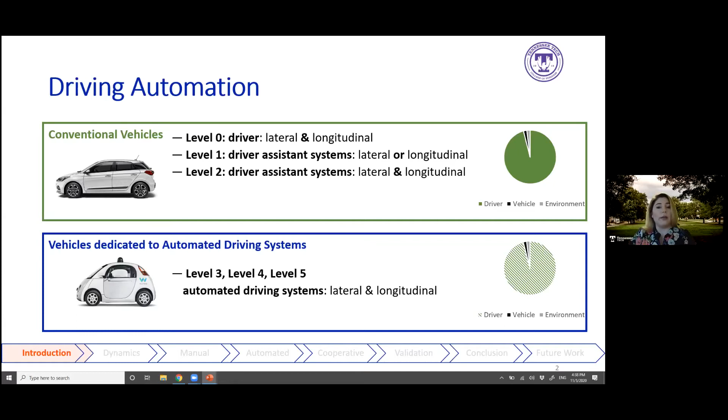Cooperative driving automation is a new chapter in the transportation engineering field. It means vehicles dedicated to automated driving systems use vehicle-to-vehicle communication to cooperate with their surrounding vehicles. The intent is to enhance dynamic driving task performance, safety, and traffic operations.

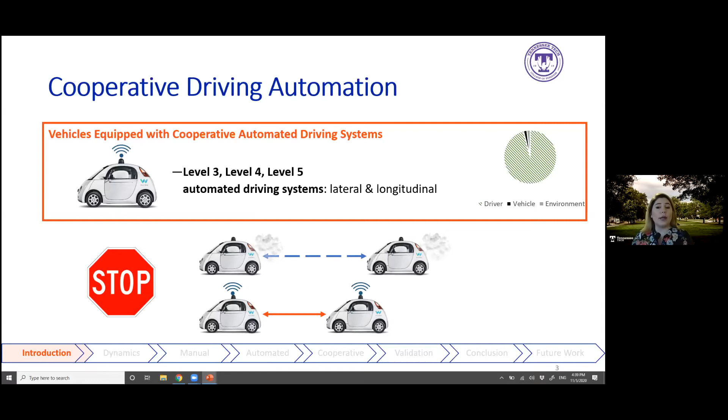As you can see in the figure I've demonstrated here, vehicles equipped with cooperative automated driving systems can follow their leaders at shorter gaps and with less variation in acceleration and deceleration compared to vehicles dedicated to automated driving systems.

Commanded accelerations and decelerations are automatically confined to maximum accelerations and maximum decelerations specific to vehicle properties, road conditions, speed, and operation mode. Longitudinal controller coefficients in this research are those proportional, integral, and derivative gains that can be tuned to achieve desired performance, such as maximizing throughput without compromising safety or string stability.

In this research, vehicle dynamics is incorporated into minimum safe distance gap, maximum acceleration, and maximum deceleration for conventional vehicles, and minimum safe time gap, controller coefficients, maximum acceleration, and maximum deceleration for vehicles dedicated to automated driving systems, which we call vehicles in automated mode, and vehicles equipped with cooperative automated driving systems, which we call vehicles in cooperative automated mode.

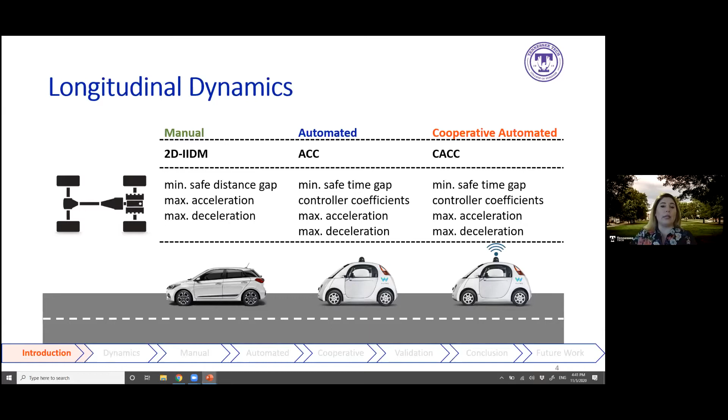So what is the problem here? The problem is that conventional traffic microsimulation tools, such as VISSIM and AIMSUN, automatically confine accelerations and decelerations to constant or estimated maximum accelerations and decelerations, and rely on constant distance gaps and time gaps to simulate longitudinal control for automated vehicles in a platoon or a string.

So when you want to simulate longitudinal control functions such as adaptive cruise control or cooperative adaptive cruise control, you have to input all of these longitudinal control variables. It's not like cooperative adaptive cruise control in the real world, where these variables are calculated automatically.

For example, VISSIM empirically estimates maximum acceleration and maximum deceleration based on speed, AIMSUN assumes a constant maximum acceleration and deceleration as default, and MITSIM uses a constant maximum acceleration and deceleration for each speed range. All require user inputs for distance gap, time gap, and controller coefficients to simulate automated vehicles in a platoon or string.

This research, what does it do? It incorporates driver characteristics, engine, transmission, and drivetrain properties, aerodynamic resistance, rolling resistance, grade resistance, speed, and operation mode — which we collectively call vehicle dynamics — into calculating maximum acceleration, maximum deceleration, minimum safe distance gap, minimum safe time gap, and longitudinal controller coefficients, which I call longitudinal control variables in the rest of this presentation.

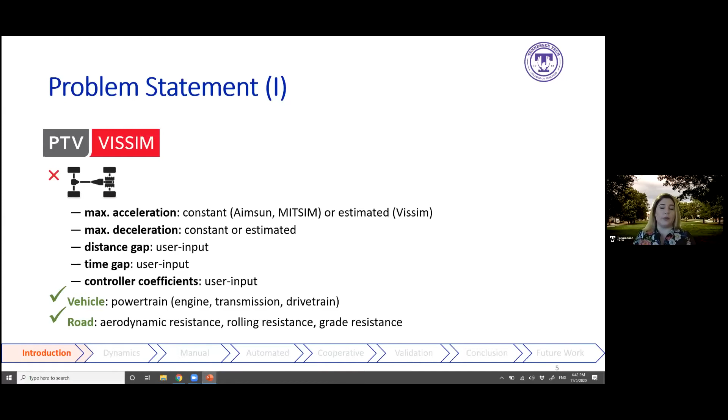So how do we incorporate vehicle dynamics into a traffic microsimulation tool? Currently, none of the traffic microsimulation tools are able to model vehicle dynamics. So what we did, for example, to calculate maximum acceleration, we adopted the model developed by Dr. Washburn at the University of Florida, who was the first to introduce maximum acceleration in a traffic microsimulation tool. This tool is called SwashSim.

I personally developed maximum deceleration, minimum safe distance gap, and minimum safe time gap, and incorporated them into a new traffic microsimulation tool.

Maximum deceleration is calculated based on maximum braking force, aerodynamic resistance, rolling resistance, grade resistance, and mass.

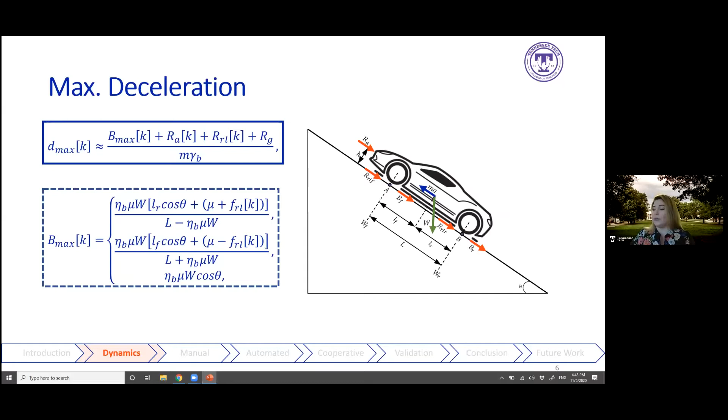Minimum safe distance gap and minimum safe time gap are calculated based on sensing delay for conventional vehicles and vehicles dedicated to automated driving systems, and communication delay for vehicles equipped with cooperative automated driving systems, as well as speed, aerodynamic resistance, rolling resistance, grade resistance, and maximum deceleration.

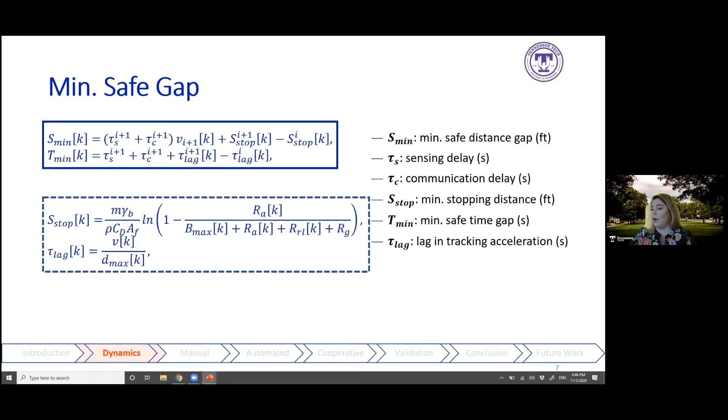I don't want to go through the equations in more detail — you can find them in my recent publication in Transportation Research Part C.

Regarding vehicle generation — because in a traffic microsimulation tool you have to generate vehicles and then simulate the interactions between these vehicles and their surrounding environment — how do we generate vehicles? Regarding the vehicle dispatching model for our traffic microsimulation tool, we assume that entry headways follow a shifted negative exponential distribution, with the distribution parameter calculated based on flow rate and minimum entry headway. So it's based on random distributions.

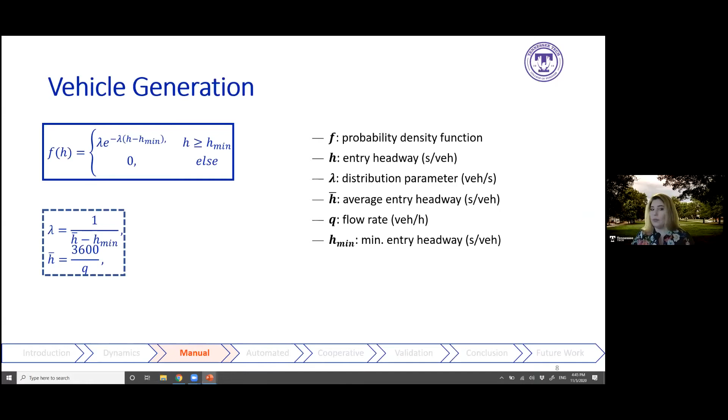Our customized traffic microsimulation tool contains 10 driver types. We have several modules: one is driver, another is vehicle, and another is operating mode. Regarding the driver module, we have 10 driver types, ranging from type 1, the most conservative driver, to type 10, the most aggressive driver. We treat drivers, vehicles, and operating modes as distinct objects so that users can customize vehicle and driver characteristics separately.

Conventional vehicles are assumed to follow a two-dimensional improved intelligent driver vehicle-following model, a well-known vehicle-following model. But what we did was consider driver characteristics, physical and powertrain properties, and resistance forces in calculating minimum safe distance gap, speed, maximum acceleration, and maximum deceleration. So we adopted a vehicle-following model commonly used in transportation engineering, but modified it based on vehicle dynamics.

The two-dimensional improved intelligent driver model is easier to calibrate and demonstrates more stable performance compared to the Wiedemann model, which is the vehicle-following model used in VISSIM.

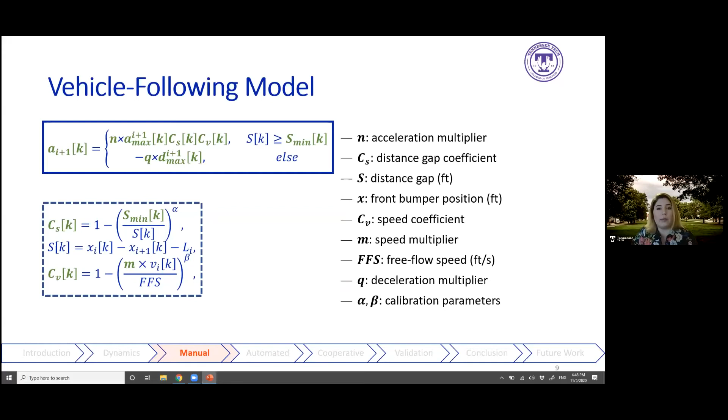VISSIM is a very well-known traffic microsimulation tool. We consider 10 passenger car models, a single unit truck, an intermediate semi-trailer, an interstate semi-trailer, and a double semi-trailer. In our traffic microsimulation tool, we have implemented vehicle dynamics models for 10 passenger car models and 4 truck configurations. We can include more, but for these 14 vehicle models, we had data.

We consider them over 2 driving schedules: US06 and Cycle D. These 2 driving schedules were assumed to be a reference speed profile for our leader, and they are designed to test vehicles with aggressive driving behavior. We wanted to test them in 2 driving schedules designed for aggressive driving behavior to make sure we can capture the full range of the vehicle dynamics model.

All the results in the upcoming slides are calculated by taking the average of 20 replications for each scenario. Because vehicles are generated randomly, we use 20 replications to make sure we capture all of the vehicle models with all of the driver characteristics and vehicle dynamics models. We could capture more, but after trial and error we found that 20 is a reasonable number.

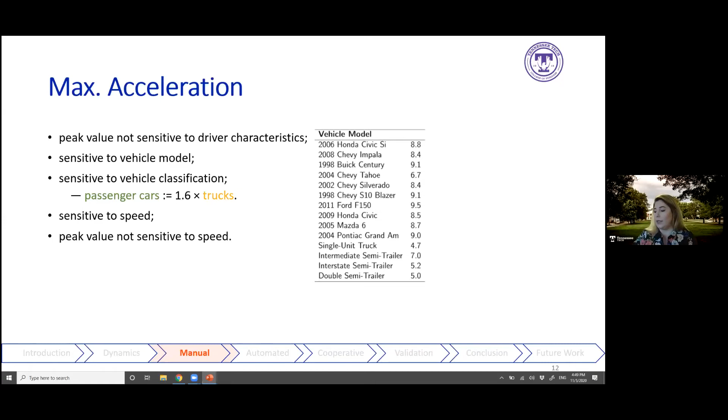Regarding maximum deceleration, the same - it has a dynamic model, but has less variation compared with maximum acceleration. Maximum deceleration is also sensitive to vehicle model, vehicle classification, and speed. For example, it ranges from 24.6 to 27.9 feet per second squared for passenger cars and 19.4 to 26.2 feet per second squared for trucks. Passenger cars have on average 1.2 times higher maximum deceleration compared to trucks, and on average vehicles have higher maximum deceleration at higher speed. However, peak maximum deceleration is not sensitive to driver characteristics.

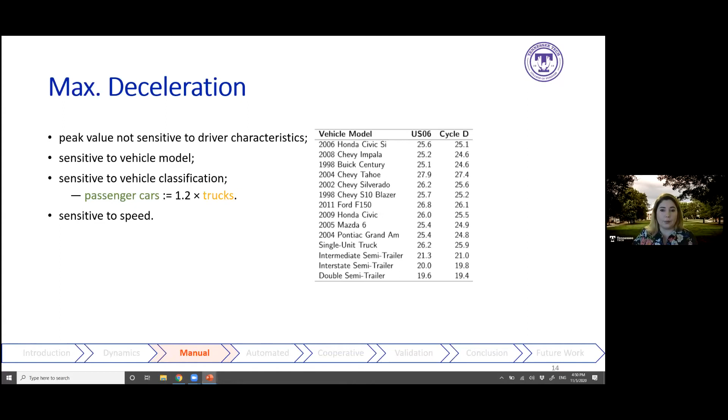Regarding minimum safe distance gap, I want to give you a hint: maximum acceleration and maximum deceleration are not sensitive to operating mode. Whether the vehicle is driving in manual mode, automated mode, or cooperative automated mode, it has the same maximum acceleration and maximum deceleration value, because these two variables are only sensitive to vehicle properties and vehicle dynamics, and should not change with operating mode.

But regarding minimum safe distance gap and minimum safe time gap, they definitely change with operating mode. In manual mode, minimum safe distance gap is sensitive to driver characteristics, vehicle model, vehicle classification, and speed. Minimum safe distance gap ranges from 80.4 to 225.8 feet for passenger cars and 89.8 to 336 feet for trucks. But if you look at literature in transportation engineering papers, you see that they assume a much lower minimum safe distance gap, like 10 feet or so, because they don't consider vehicle dynamics.

At very high speed, vehicles should maintain a higher minimum safe distance gap. And if we assume a constant value for minimum safe distance gap, we should definitely consider a much longer distance gap. Trucks require on average 1.7 times longer minimum safe distance gap at higher speed and 1.3 times longer at lower speed compared to passenger cars. Vehicles require on average 2.1 times longer minimum safe distance gap at higher speed. You might think, why do we need all these numbers?

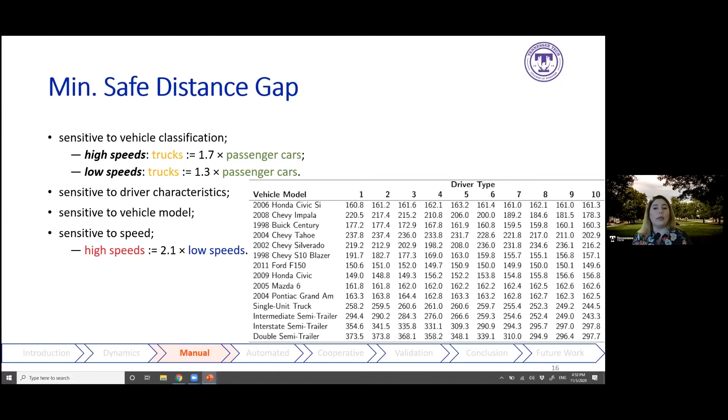But if they want to use dynamic values, which is what we recommend for a traffic microsimulation tool, they can use our traffic microsimulation tool, or they can incorporate our proposed models into their traffic microsimulation tool.

Regarding minimum safe time gap, it is sensitive to driver characteristics, vehicle model, vehicle classification, and speed. Minimum safe time gap ranges from 1.8 to 3.9 seconds for passenger cars and 1.8 to 5.5 for trucks. Trucks require on average 1.9 times longer minimum safe time gap at higher speeds compared to passenger cars, and vehicles require on average 1.6 times higher minimum safe time gap at higher speeds.

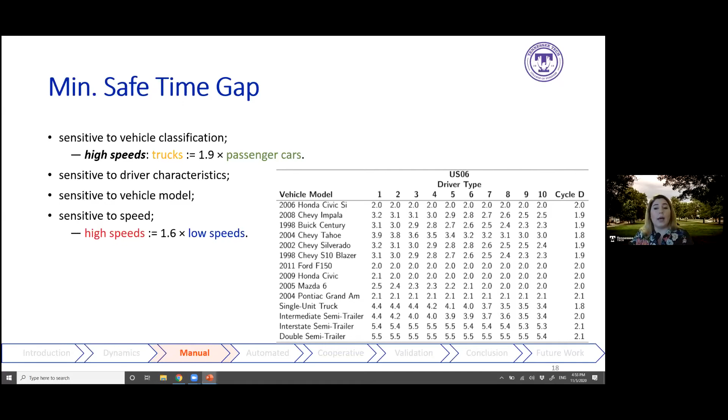In three situations, the automated longitudinal control function, which is very similar to adaptive cruise control, is activated: when a vehicle dedicated to an automated driving system approaches a vehicle or a vehicle dedicated to an automated driving system is equipped with a cooperative automated driving system and approaches a vehicle with the same characteristics, or there is a significant discrepancy between onboard sensor measurements and V2V transmitted messages.

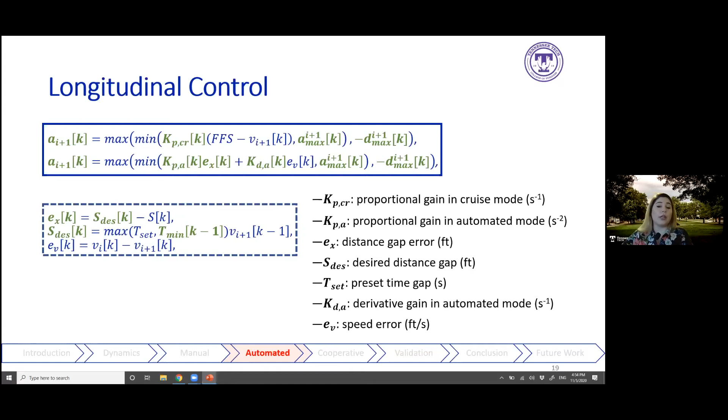When no leader is detected, cruise control is activated. Cruise control in this scene can be simulated as the first equation, but with empirically estimated maximum acceleration and maximum deceleration values. Adaptive cruise control in this scene can be simulated as the second equation, but with empirically estimated maximum acceleration, maximum deceleration, constant time gap, and constant controller coefficients.

Let's consider how we design this longitudinal control function. Let's consider two transfer functions, H and G. H is the closed-loop transfer function. Excluding a strict left half plane zero from H results in the second equation, which is G.

Step response of G has higher rise time, lower overshoot, not significantly different settling time, higher peak time, and consequently not significantly different distance traveled during overshoot compared to step response of H.

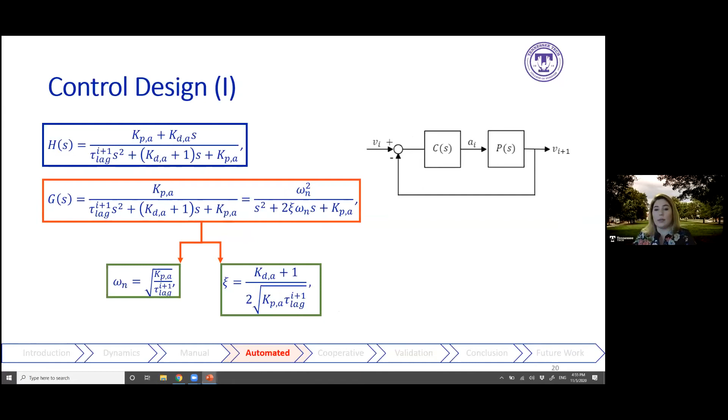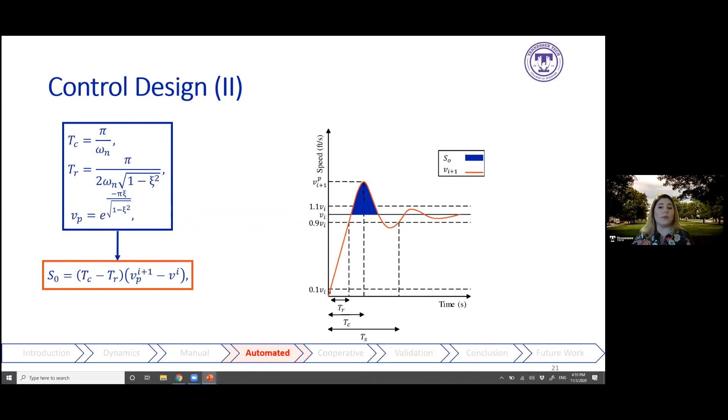Distance traveled during overshoot, which is the shaded area in the figure, can be calculated based on critical time, rise time, peak speed, and leader speed. Critical time is the shortest time taken for the step response to reach its peak value, and rise time is the time taken for the step response to rise from 0.1 to 0.9 of its final value.

Distance traveled during overshoot should be less than or equal to minimum safe distance gap during acceleration, and settling time should be less than or equal to minimum safe time gap during deceleration. Settling time is the shortest time taken for a step response to enter a band of plus or minus 10% of its final value and remain in that band thereafter.

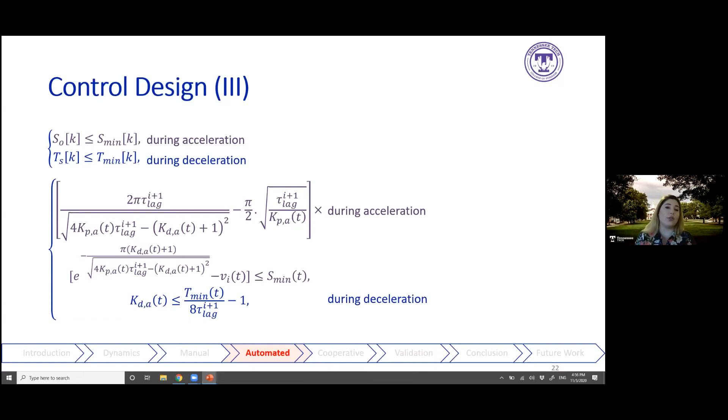These two conditions should be satisfied in order to maximize throughput without compromising safety, because usually in traffic microsimulation tools people just assume constant controller coefficients, so they cannot ensure that they can maximize throughput without compromising safety.

Consider 14 vehicle models, again following a 2006 Honda Civic on automated mode over US06 and Cycle D driving schedules, assuming vehicles drive in a single lane and there is no cut-in or cut-out maneuvers, because we just want to focus on longitudinal control functions, not lateral control functions. So we completely excluded cut-in and cut-out maneuvers.

Regarding maximum acceleration, I can tell you the same results. So in automated mode, we have the same maximum acceleration and maximum deceleration results that I don't want to go through in detail. But regarding minimum safe distance gap, definitely we have a much shorter distance gap.

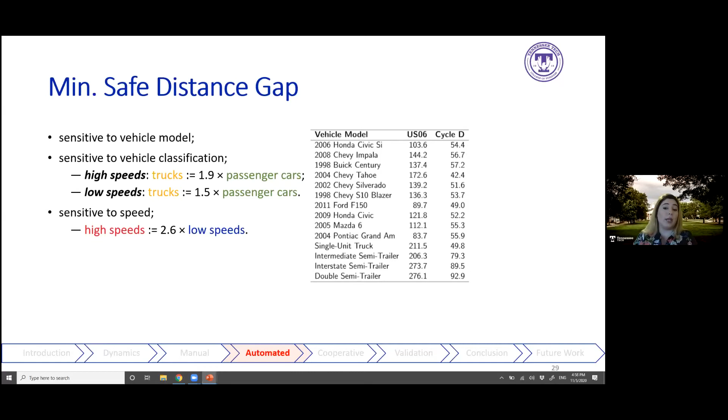Minimum safe distance gap is sensitive to vehicle model, vehicle classification, and speed. Minimum safe distance gap ranges from 42.4 to 172.6 feet for passenger cars and 49.8 to 276.1 feet for trucks. Trucks require on average 1.9 times longer minimum safe distance gap at higher speed and 1.5 times longer at lower speed. Compared to lower speeds, vehicles require on average 2.6 times longer minimum safe distance gap at higher speeds.

Regarding minimum safe time gap, it is similarly sensitive to vehicle model, vehicle classification, and speed, and again we require a much shorter time gap compared to vehicles in manual mode. Minimum safe time gap ranges from 1.3 to 2.5 seconds for passenger cars and 1.3 to 4.7 seconds for trucks. Trucks require on average 2 times longer minimum safe time gap at higher speed compared to passenger cars, and vehicles require on average 1.6 times higher minimum safe time gap at higher speed.

Conventional traffic microsimulation tools do not provide a platform to simulate vehicles in a contested environment. What do we mean by contested environment? It is an environment where a hacker can hack the vehicle or hack the communication channels between vehicles.

Our customized traffic microsimulation tool can simulate vehicles in uncontested and contested environments, assuming distance gap and speed are prone to measurement noise and process noise, and received accelerations are prone to measurement noise, process noise, natural fault, and malicious fault. By malicious fault we mean data falsification attack, which is one kind of malicious fault.

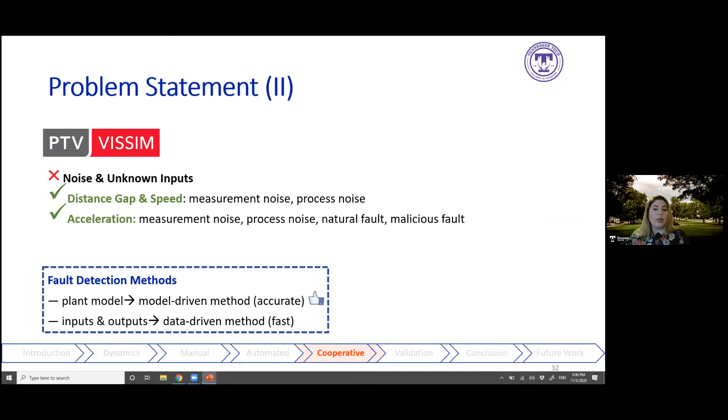In this research, we detect fault using Kalman filter. When an automated vehicle with vehicle-to-vehicle communications approaches another vehicle with vehicle-to-vehicle communications, connected longitudinal control similar to cooperative adaptive cruise control is activated. When no leader is detected, adaptive cruise control is activated.

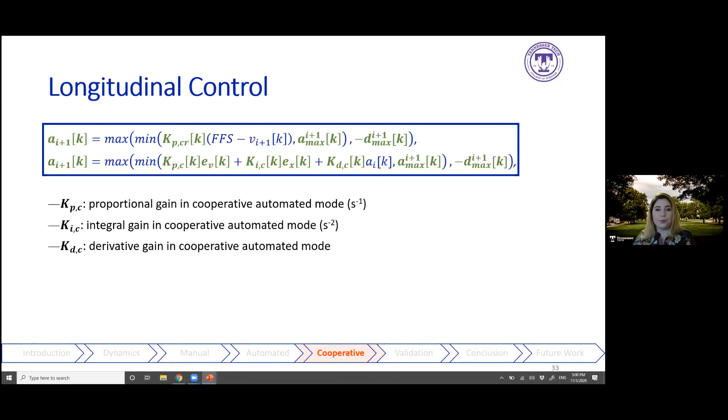Cooperative adaptive cruise control in VISSIM and AIMSUN are modeled as the second equation, but with empirically estimated and constant maximum accelerations and maximum decelerations, constant time gaps, and constant controller coefficients. Kalman filter is used to estimate states, which are distance gap, speed, and acceleration, with minimum error. Distance gap and speed are known states, and acceleration is an unknown state.

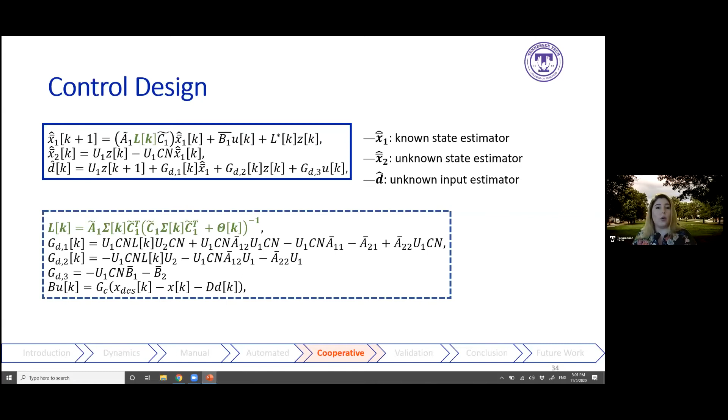Unknown inputs are used to model fault, uncertainty, and noise with unknown statistics. The derivation of these equations to estimate unknown states and unknown inputs is discussed extensively in our submitted paper to IEEE Transactions on ITS. So if you want to know the details of this equation, I can share it with you later.

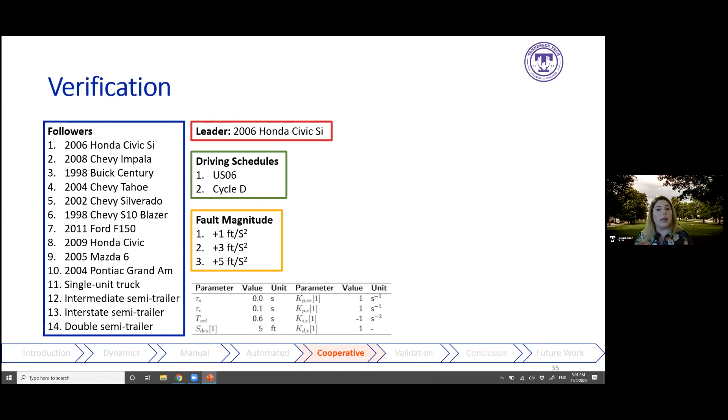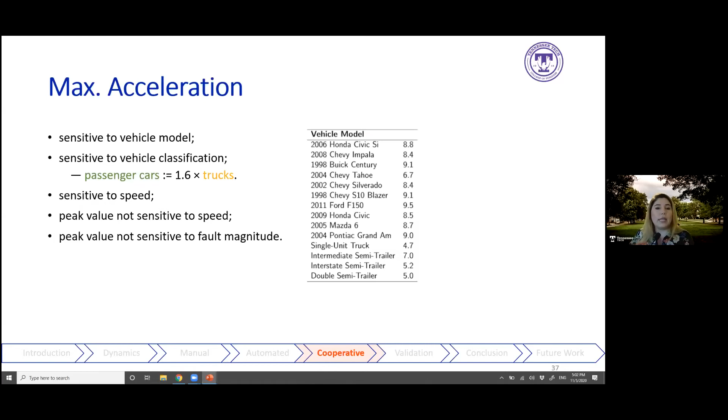Again, consider the same situation, the same 14 vehicle models, but this time in cooperative automated mode. We have assumed 1 foot per second squared, 3 feet per second squared, and 5 feet per second squared malicious fault on transmitted accelerations, assuming again that vehicles drive in a single lane and there is no cut-in or cut-out maneuver. Results show maximum acceleration is the same, so it doesn't matter whether vehicles are operating in a contested environment or not, we have the same maximum acceleration and maximum deceleration results. But what is acceleration error?

Acceleration error is defined as acceleration under normal conditions minus acceleration 0.1 second before a crash occurs under faulty conditions. 0.1 because it's our simulation time step. Acceleration error is sensitive to vehicle model, vehicle classification, and fault magnitude, but not speed. Passenger cars have on average 1.1 times longer acceleration error at higher speeds and 1.2 times longer acceleration error at lower speeds compared to trucks.

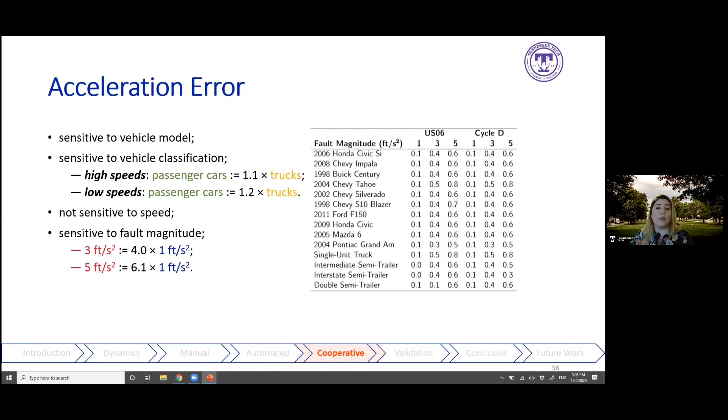Vehicles have on average 4 times longer acceleration error under 3 feet per second squared malicious fault, and 6.1 times longer acceleration error under 5 feet per second squared malicious fault, compared to just 1 foot per second squared malicious fault. So it's definitely sensitive to the malicious fault magnitude. This acceleration error is very sensitive to the magnitude of malicious fault.

But because we have assumed that we are in a contested environment, results are not as good as we'd assume. For example, most of the literature on cooperative driving automation claims that it can increase efficiency or reduce number of crashes significantly, for example increasing efficiency by 400%, or reducing number of crashes by 94%. But because we assume that vehicles operate in a contested environment, these results are not as good as what we assume.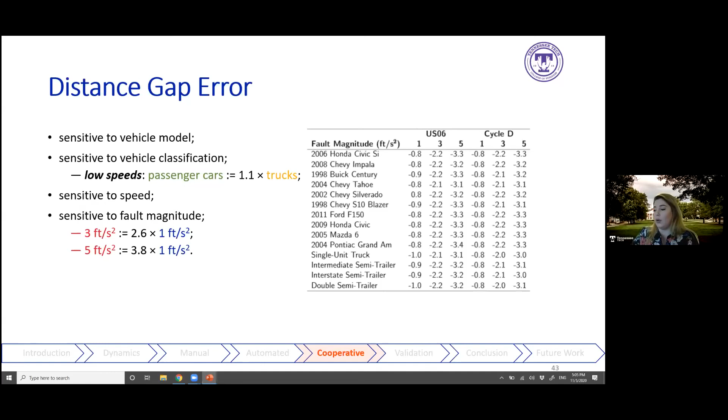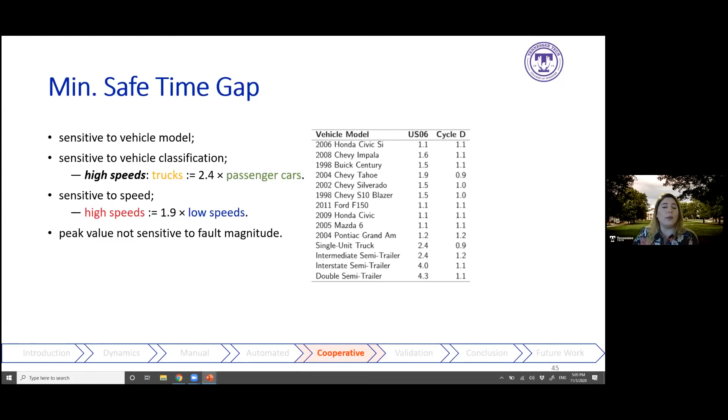Regarding minimum safe time gap, I can say almost the same. We require much shorter time gap compared to conventional vehicles and vehicles in automated mode, but only if we assume that vehicles operate in uncontested environments.

So if we assume vehicles operate in contested environments, first let me define what is crash time. The time it takes till a crash occurs under malicious fault is sensitive to vehicle model, vehicle classification, speed, and fault magnitude.

Passenger cars crash on average 2.7 times sooner compared to trucks at higher speeds, and 1.2 times sooner compared to trucks at lower speed if they operate in a contested environment.

Vehicles crash on average 1.4 times sooner at lower speed, and vehicles crash on average 1.7 times sooner under 3 feet per second square and 5 feet per second square malicious fault compared to when only they operate under 1 feet per second square malicious fault.

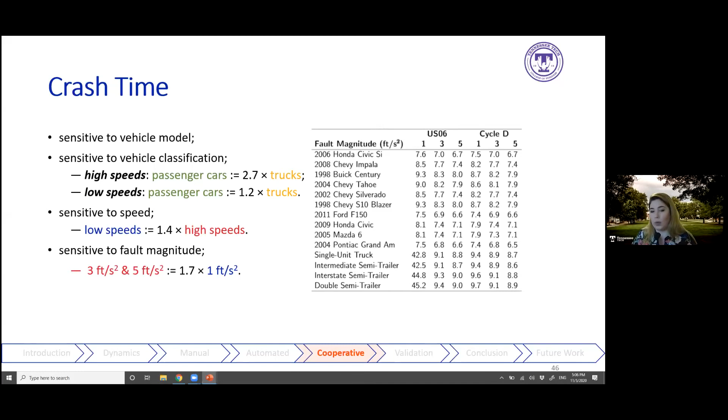So at the end, we wanted to validate our model using a vehicle dynamics simulation tool called TruckSim in this research. Our proposed maximum acceleration model is validated against this industry standard simulation tool for 53,000 pound and 80,000 pound interstate semi-trailers under 0%, 2%, and 4% grades.

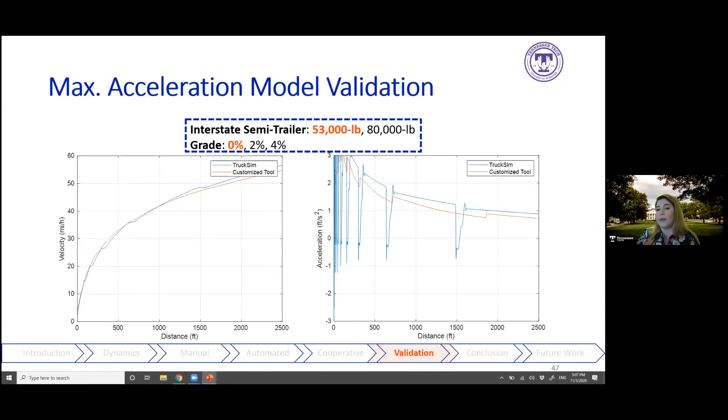53,000 pound is based on Florida weight in motion data, and 80,000 pound is maximum legal load without a permit. So we wanted to validate our model under a very aggressive situation to make sure that we capture all of the conditions.

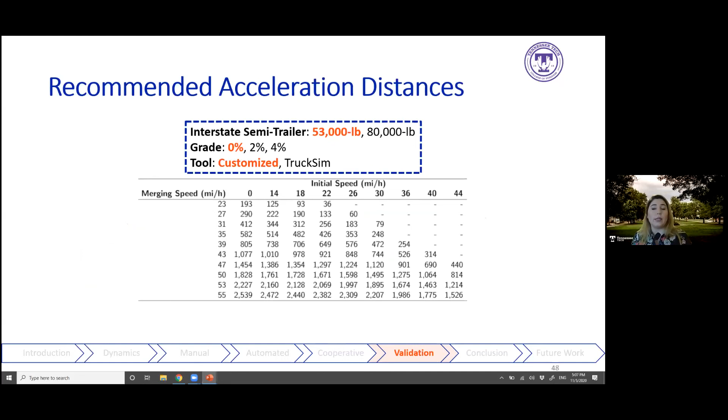Proposed maximum acceleration model is further used to calculate minimum acceleration distances required for 53,000 pound and 80,000 pound interstate semi-trailers, accelerating from various initial speeds to reach various highway design speeds on 0%, 2%, and 4% grades.

Studies show that recommended acceleration distances in literature are not sufficient to accommodate safe merging speeds for trucks because they don't consider vehicle dynamics. Our results show that TruckSim produces most conservative acceleration distances for 53,000 pound interstate semi-trailer.

Our customized traffic microsimulation tool produces most conservative acceleration distances for 80,000-pound interstate semi-trailers compared to the recommended values by AASHTO. We have validated our model in an FDOT funded project, and if you are interested to know more about this validation process, I can share with you this FDOT proposal project report.

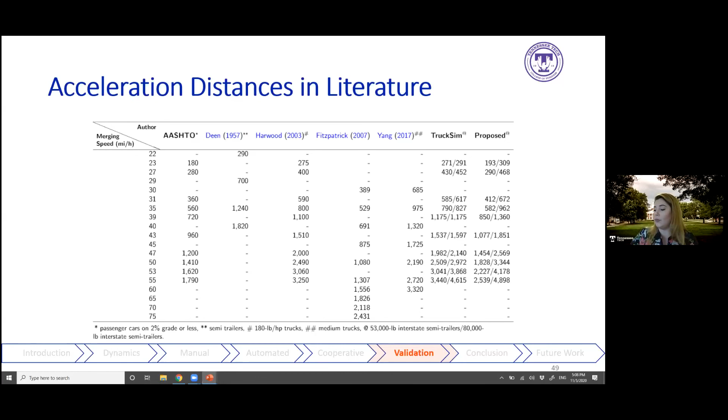In conclusion, we can say that maximum acceleration, maximum deceleration, minimum safe distance gap, minimum safe time gap, distance gap error, and crash time, all of them are sensitive to driver characteristics, vehicle model, vehicle classification, speed, operation mode, and fault magnitude that people completely ignore in their research.

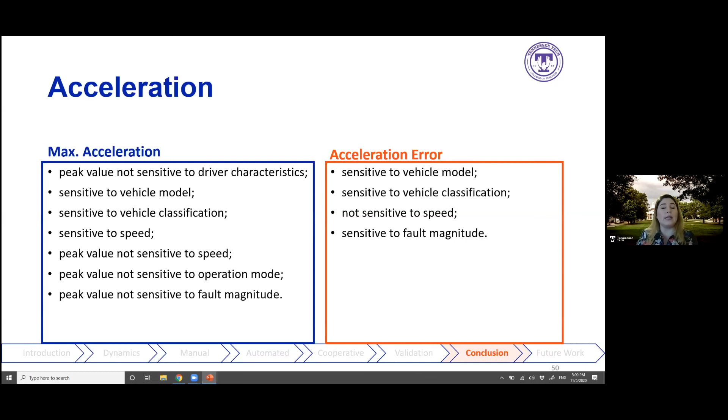Peak maximum acceleration is not sensitive to driver characteristics, speed, operation mode, and fault magnitude, and acceleration error is sensitive to vehicle model, vehicle classification, and fault magnitude, but not to speed. Peak maximum deceleration is sensitive to driver characteristics and fault magnitude.

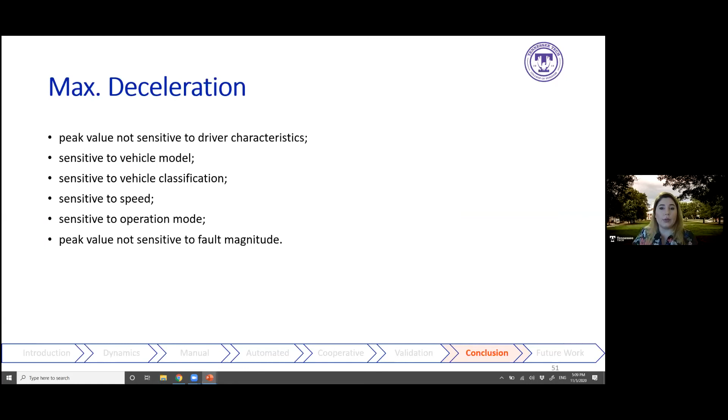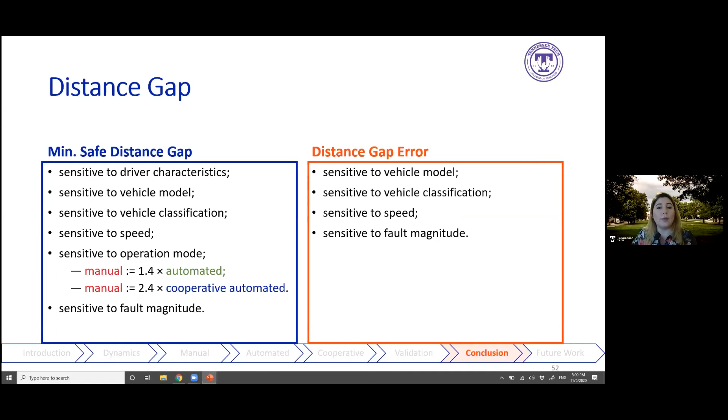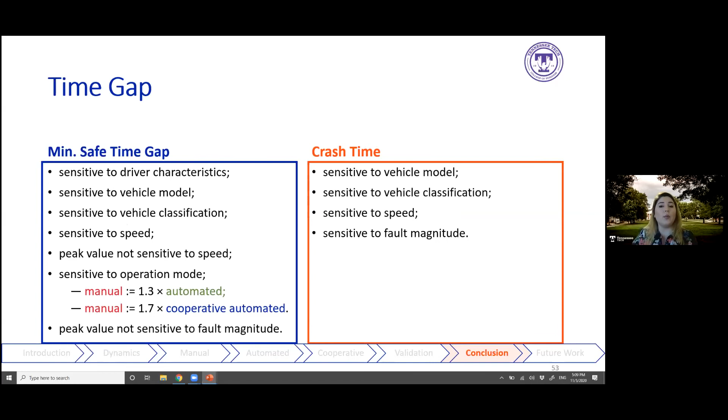In manual mode, vehicles require on average 1.3 times longer time gap than in automated mode and require 1.7 times longer time gap than in cooperative automated mode.

However, in this research, we only assume that drivers drive in a single lane and there is no lane change maneuver, while a lane change maneuver can temporarily affect vehicle following behaviors. For example, drivers speed up or slow down to align with acceptable gaps in target lanes, or temporarily adopt shorter gaps after a lane change maneuver or after a vehicle merges in front.

Future work can model other significant components underpinning a traffic microsimulation tool, which are lane changing and gap acceptance models.

Microscopic measures in this research, which are distance headway and time headway, can be aggregated to macroscopic measures, which are density and flow. Future work can estimate macroscopic benefits associated with cooperative driving automation, which is increased roadway capacity under various market penetrations for vehicles dedicated to automated driving systems or vehicles equipped with cooperative automated driving systems.

Most common cyber attacks can be modeled as faults, such as data falsification and spoofing attacks, or time delays, such as denial of service attacks. Cyber attacks in this research were modeled only as faults. Future work definitely can model cyber attacks as fault or time delay.

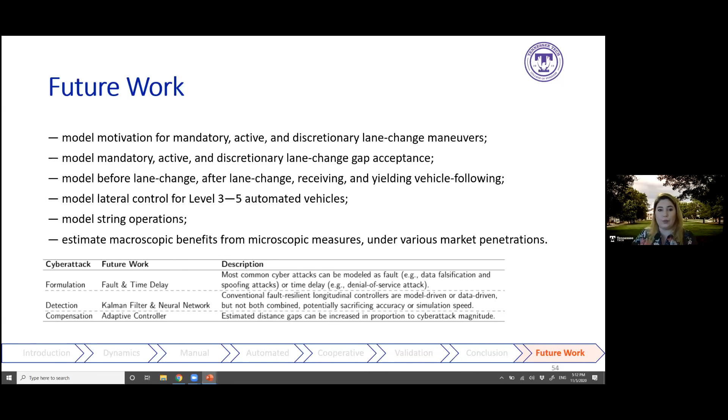At the end, I really appreciate that you took the time to participate in this presentation. I would be more than happy to answer any questions or address any concerns that you might have. Thank you.